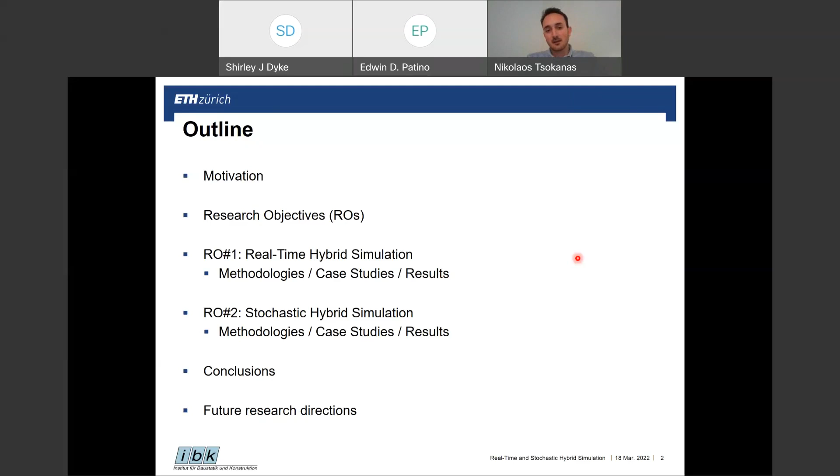So to begin with, what is the motivation behind this research project? It's often the case that prior to any engineering decision, we may consult a high-fidelity model in order to give some insight to the performance of the examined structure, but to also account for any potential risks that are embedded in its design. Therefore, the overarching goal is to develop some trusted models of uncertain engineering structures that operate under uncertain conditions. And this process is what we call dynamic virtualization.

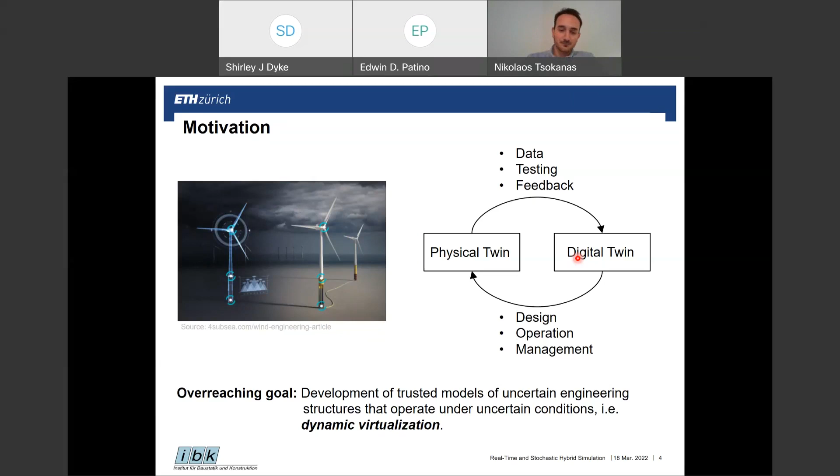However, in order to create such trusted models, it's essential to go through the so-called process of verification and validation. And today I'm going to talk basically about validation. A key element of validation is the experimental testing. And in structural engineering disciplines, we often come across three popular test techniques. The first one is the quasi-static test, which is the simpler to conduct, at least in comparison with the other two, but it can be restricted to the nature of the predefined imposed loadings.

On the other hand, we have the full-scale physical dynamic testing, with which we can get quite realistic outcomes, but the associated experimentation costs can grow significantly, because we don't only have to build a specimen full scale, but we also need the appropriate experimental equipment capable enough to test such large full-scale tests. And then another alternative is hybrid simulation, which corresponds to the whole part of this project. Basically, it combines the flexibility of numerical simulations with the realism of experimental testing. Essentially, it offers a cost-effective alternative to full-scale physical dynamic testing.

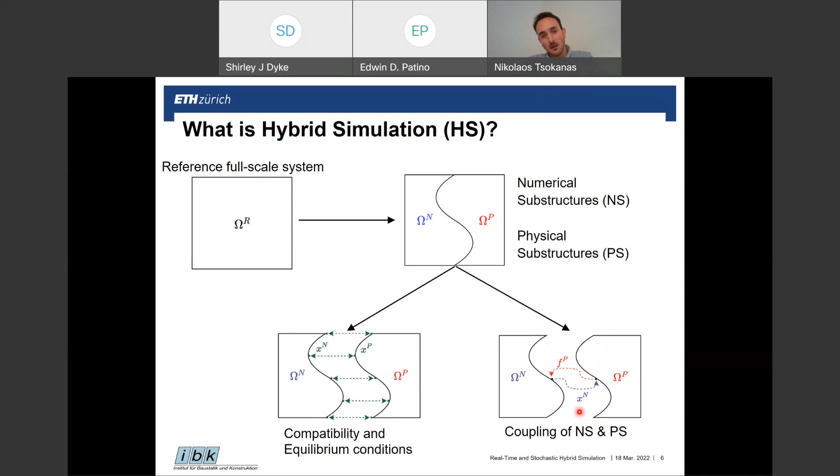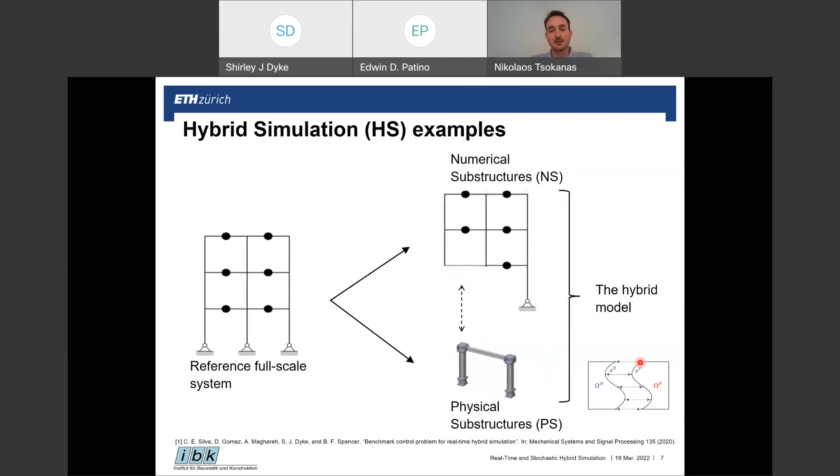And then at every time step of the simulation, we will need to ensure that the boundary conditions between those two are synchronized in order to ensure high fidelity results. Another example from another engineering discipline is this motorbike. Let's imagine that this could be the reference scale system. Now, if we're particularly interested in the transmission of the motorbike, then this could represent our physical substructure, built and tested physically in the lab, while the remainder of the motorbike is numerically simulated. And then again, the fusion of the two would form the hybrid model.

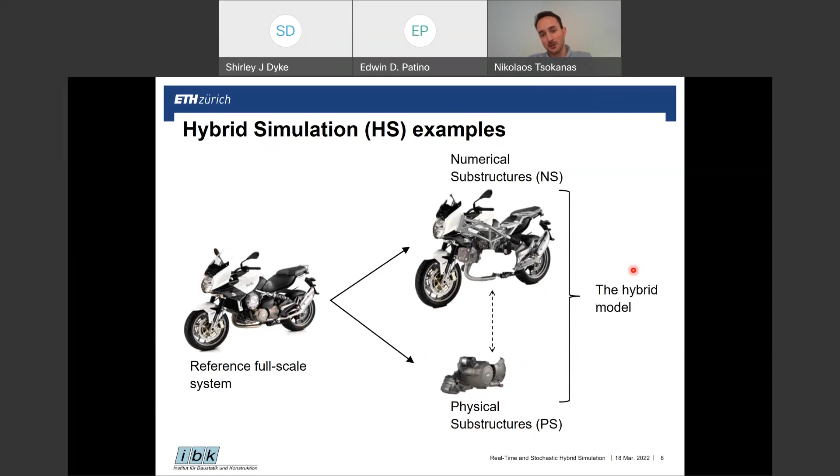But this brings us to the question of whether the actual hybrid simulation outcomes are reliable. So we're basing our assumption that by decomposing our reference full-scale system into numerical and physical substructures, and by only testing physically the physical substructure, taking into account the interconnection with numerical ones, we can have a cost-effective simulation technique alternative to full-scale physical dynamic testing. However, in order to have this assumption valid, we will need to make sure that the response of the reference full-scale system would actually be quite close to the response of our hybrid model.

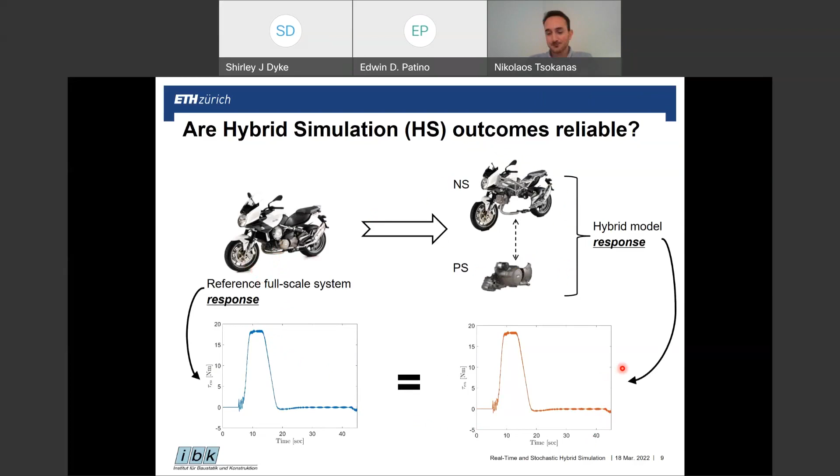And this point drove our motivation for the first research objective, which is how we can conduct hybrid simulations of high fidelity. And it's often the case that we will need to do hybrid simulation in real time to achieve this. Nevertheless, when we try to do that in real time, we may come up with several challenges that we need to overcome. And the exact objective of this first research objective is what methodologies can we develop to overcome such challenges.

Once this is accomplished, we can move forward to the second research objective, which is to extend the state-of-the-art deterministic hybrid simulation to a more stochastic version. And by this, I mean to account for the stochastic nature of uncertain structural systems. And the motivation behind this is that it happens often that we may not know some parameters of our hybrid model, for example, the damping structure, some boundary conditions, as well as the excitation, which is in most cases stochastic. These are things that we do not know, or we do not know at a certain level of confidence.

And therefore, it's important to understand how these associated uncertainties can propagate and how they can affect our system's dynamic response. And essentially, what we want to achieve is to unveil the structural sensitivity of the prototype structure to these input uncertainties. And then outcomes of such studies can assist not only in the design phase of structures, but also in the design phase of future experimental campaigns.

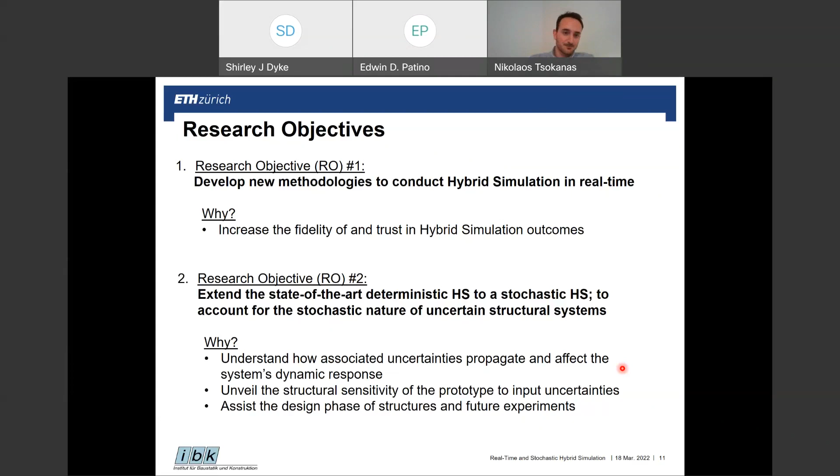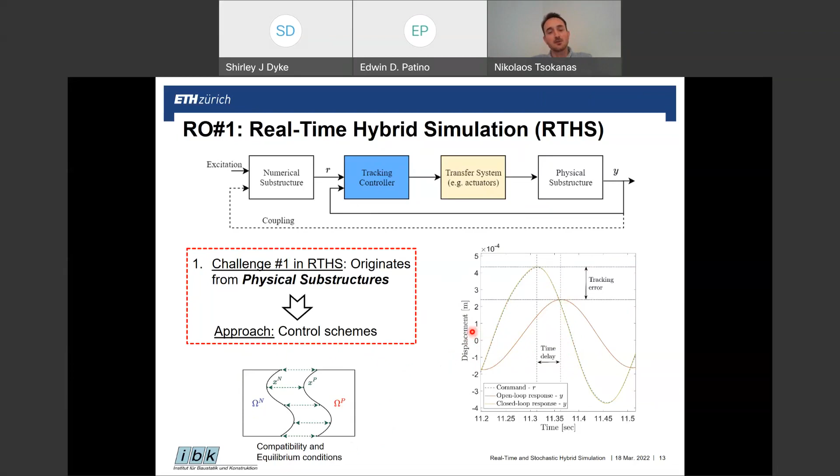Towards this direction, in this research project, we investigated two different control schemes. The first one is based on model predictive control, or MPC in short, along with the Kalman filter and the polynomial extrapolation algorithm. So the objective of the controller is to provide a tracking control, compensate for time delays, and at the same time be robust to uncertainties and disturbances that may be introduced during the hybrid simulation. We also verified the performance of the controller with two case studies, and the results were promising.

A few words regarding what MPC is. MPC is an optimal and robust control method, and at its core lies basically optimization. So what we try to do is to minimize an objective function. And this objective function actually embeds the tracking error, the error between our reference signal and the measured one.

So the designer can specify some group of time steps, and in every group of these time steps, optimization is being done within the simulation while the simulation is running, and then due to this optimization, a new control law is being derived. So although new control laws are being derived within the same simulation, the controller itself is not adapted yet, since the controller structure remains the same.

A promising feature of MPC is that the designer can specify some hard constraints to be met during this optimization. And this is particularly important when we have to deal with experimental testing, and so with hybrid simulation, because we have to deal with experimental equipment that has limited capacity, and therefore we need to respect such constraints.

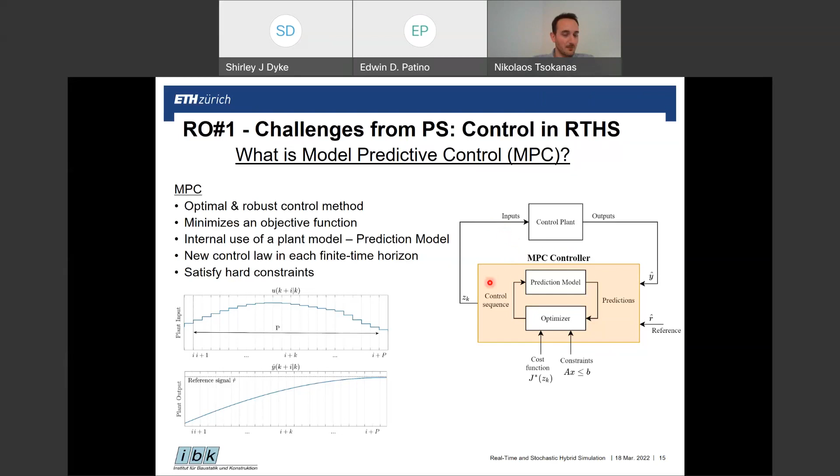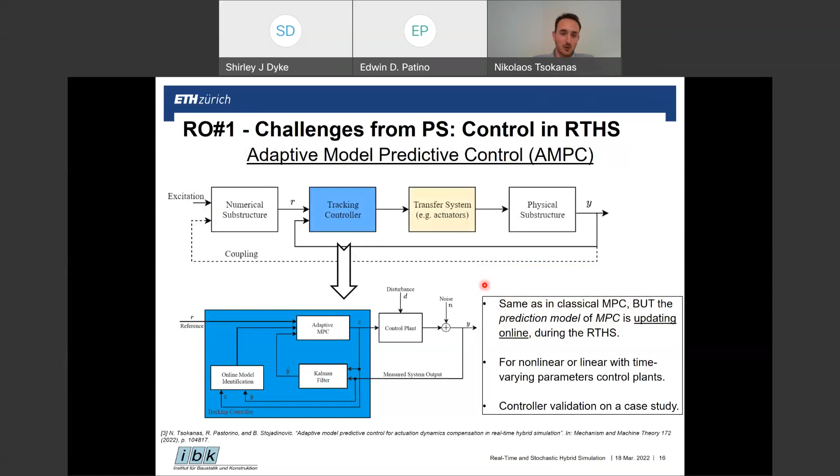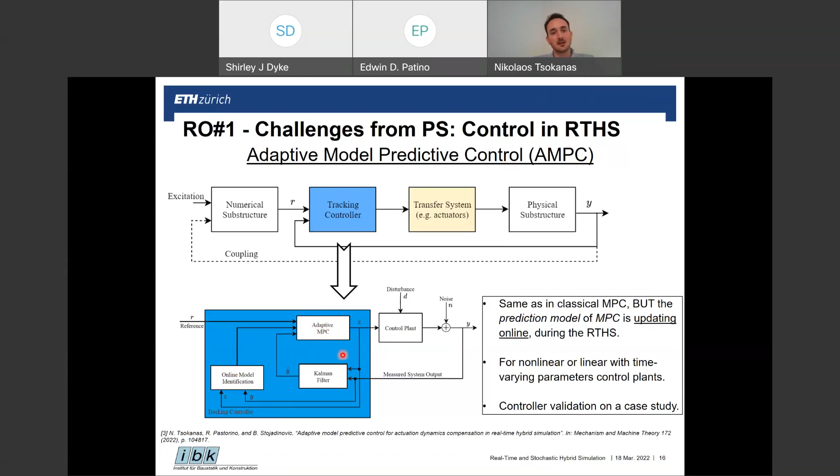And this is what triggered our motivation for the next control scheme that we investigated, and this time it's based on an adaptive MPC. So the concept is more or less the same as before. What changes in this case is that during the simulation, before we are actually doing the optimization, we try to identify the changing control plant dynamics. And therefore, by doing so, we come up with a new model of the plant every time we do the optimization, and we update the prediction model that is being used internally inside the MPC. We also used one case study to validate the performance, and again, the results were promising.

Moving on, so far I talked about challenges coming from the physical substructure itself, but we may also have challenges coming from the numerical substructure when we want to conduct hybrid simulation in real time. So recall this block diagram again, but now let's imagine that instead of only one numerical substructure, we have several. And now let's assume that maybe one or maybe all of them are quite high dimensional and complex. And then in order to adequately capture the dynamic behavior, we would need to decrease the time step of the simulation. However, by doing so, we also increase the computational power that is necessary.

And in real-time simulations, as well as in real-time hybrid simulation, when the actual computational time becomes larger or even close to the actual simulation time, then we may introduce time delays. We may also risk to distort the time scale of the simulation. And in the end, we may risk to falsify the results and the fidelity of the overall hybrid simulation. So in such cases, the only viable solution is to reduce the complexity of such high-dimensional numerical substructure.

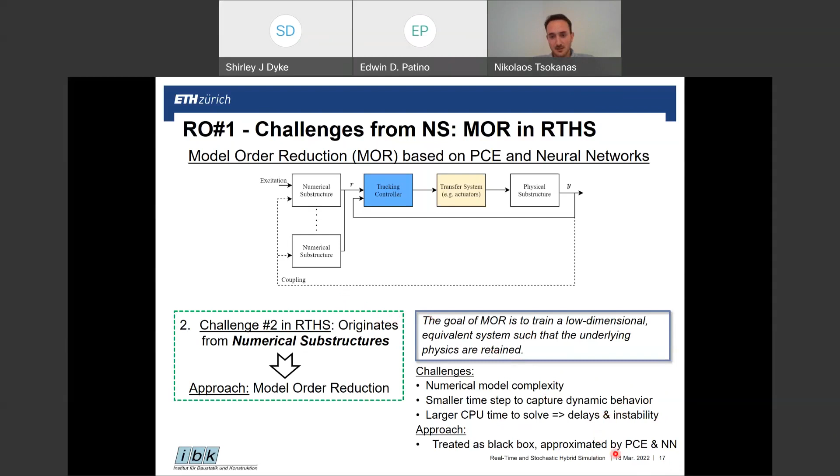And the way we tackle this challenge is by working on a model order reduction framework, trying to identify these critical components and treat them as black box. And therefore, we approximate their dynamics with some simpler to evaluate functions, and the methods that we use to do so are based on polynomial chaos expansion, or PCE in short, and neural network methods.

To elaborate a bit more on this framework, let's see this case study. Again, let's imagine that we have this motorbike as our reference full-scale system, and then we decompose into numerical and physical substructure. Then the transmission of the motorbike is our physical substructure, and all the rest will be our numerical substructure. Here we can see a block diagram of our hybrid model. Here you can see the transmission of the motorbike, physical substructure, and then we have four numerical substructures: the engine, the motorcycle body dynamics, and the rear and front wheel braking system.

Now we identified that the rear wheel and front wheel braking systems are quite complex since they incorporate the hydraulic dynamics of brakes, and therefore we train one PCE and one feed-forward neural network for each one of these two. And the goal is to substitute the full order model with one of these two reduced models.

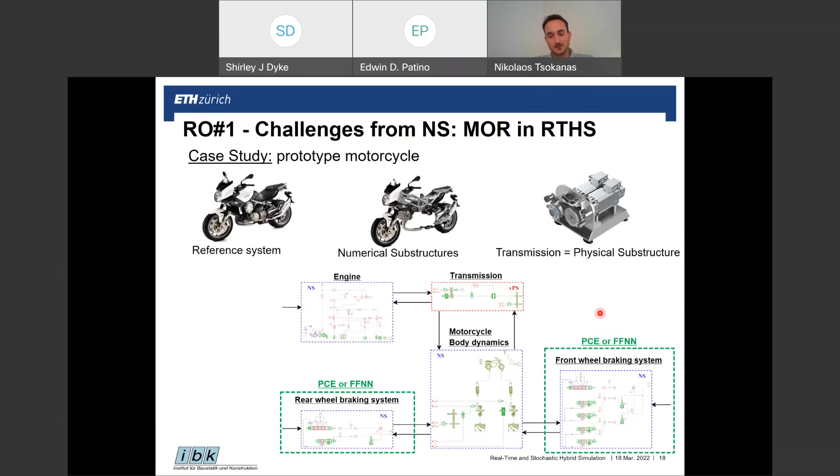To test the framework, we define four testing scenarios. The first one corresponds to a baseline scenario in which we test the hybrid model in its full order form. Then in the second scenario, we replace the full order model of the rear and the front wheel braking system with a PCE, one for each one of the two. The third scenario is more or less the same, but instead of a PCE, we are using a feed-forward neural network, one for each one of the two.

And in the last scenario, we do a mix. So we use a PCE for the rear wheel and the feed-forward neural network for the front. And the motivation behind the last scenario is to actually see if we can combine both of these two techniques within the same hybrid model.

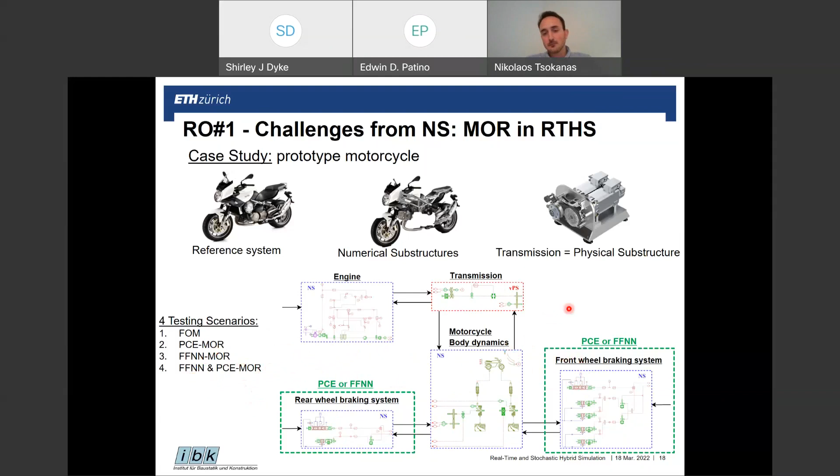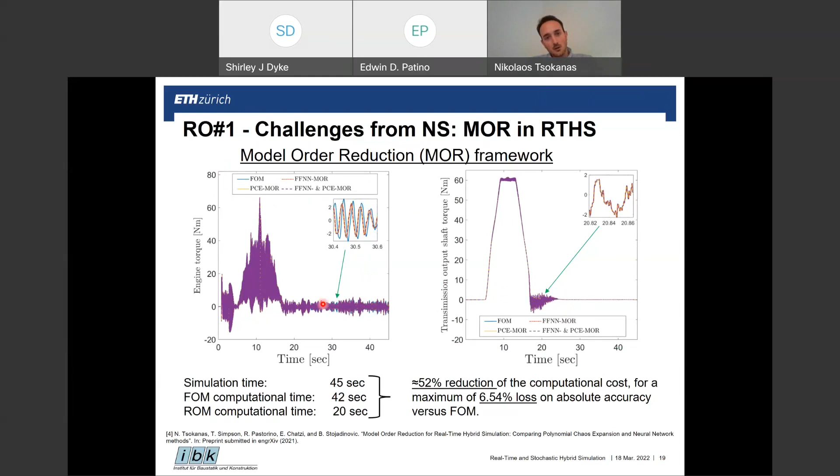So with that, I would like to conclude the first part, the real-time hybrid simulation, and move forward to the next one, which is the actual stochastic hybrid simulation. So recall that the idea behind this objective is to understand how specific uncertain parameters affect our overall dynamic response, some quantities of interest of our dynamic response. To do so, we were working on an uncertainty quantification framework, which consists of 4 steps. And the overall goal of this framework is to conduct global sensitivity analysis.

So in the first step, we try to identify the source of uncertainty. And with this, I mean that we select parameters of our hybrid model whose variation we want to investigate. After we have done that, we can assign to them some known probability distributions, and based on these distributions, we can generate some samples. Then in the next step, for each of these parameter sets, we can run one full hybrid simulation and collect our quantities of interest. And in essence, what we are doing is to propagate these uncertainties throughout our hybrid model.

Nevertheless, in order to conduct properly global sensitivity analysis, we would need several of these points. And in essence, we will need several hybrid simulations. However, when dealing with experimental tests, this is not easily affordable, and therefore we had a problem. And the way to overcome this problem is by using the so-called surrogate models.

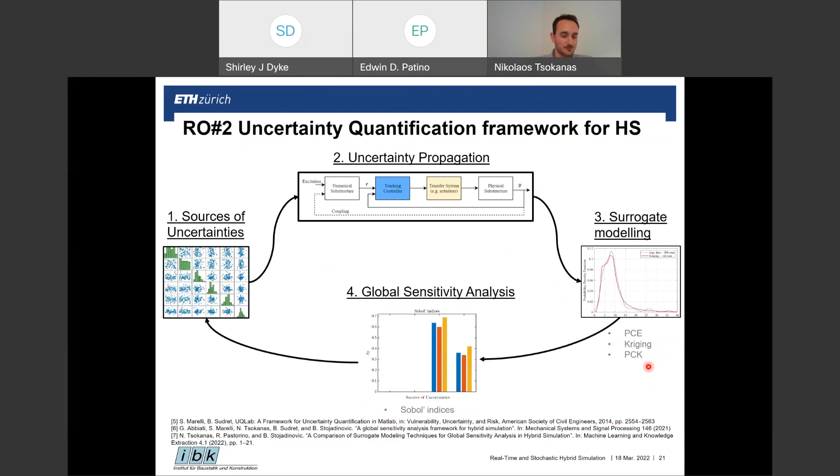Then step 1, we select our uncertainties. In this case, the excitation of the hybrid model is a mechanical excitation, and the input uncertainties are coming from this one. We select the amplitude and the frequency of excitation, and also we select as input uncertainties the values of the boundary conditions on the supports. So we have in total 4 input parameters. Then the quantities of interest are the maximum rotation and maximum bending moment on the left support.

Then we generate 200 points, and for each point we run one hybrid simulation, and with the collected data we can train one PCE, one Kriging, and one PCK for each of the 2 quantities of interest. And finally, once we are confident that these 3 surrogates are accurate, we can proceed to the last step, the one of sensitivity analysis.

Here we can have a look on the testing that is being used to run this hybrid simulation to collect these points. Here we can see the beam element of the physical substructure, and here we can see 4 actuators which are actually controlling the boundary conditions on the left and on the right side.

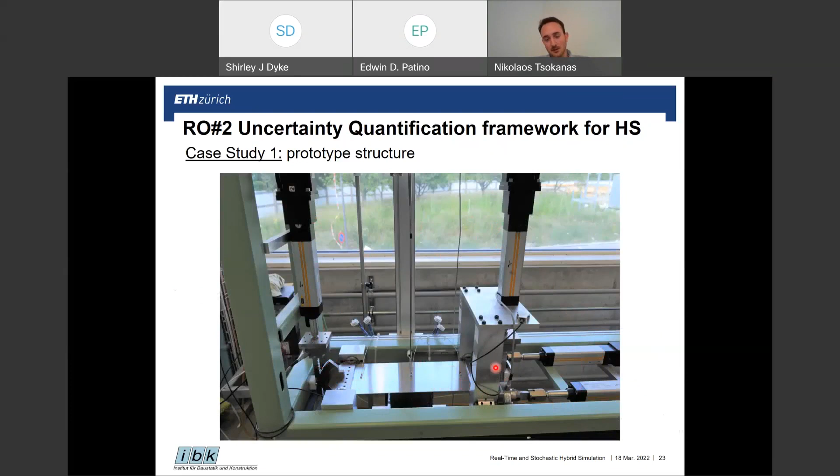So here we can see the results of the sensitivity analysis. Here on the x-axis, we see the input uncertainties and the total Sobol indices for each of the 2 quantities of interest. In both cases, we can observe that the most dominant parameter is the frequency of the mechanical excitation. What we can also observe in this slide is that when we are computing Sobol indices using those 3 different surrogating techniques, the results are not so different with each other.

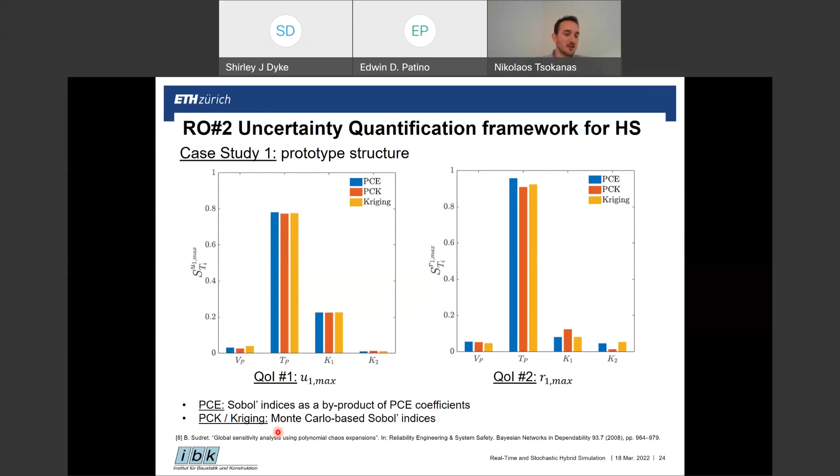An important remark is that once a PCE has already been developed, then the Sobol indices can be computed as a byproduct of the PCE coefficients at no extra computational cost. And that's not the case though for the PCK and Kriging. And the way to compute the Sobol indices in these cases is by running some Monte Carlo simulations.

So to recap this case study, we managed to compute some accurate surrogates using 3 different techniques, and then through sensitivity analysis, we managed to unveil the inner workings of the prototype structure to these uncertainties. However, we consider only uncertainties coming from the numerical substructure and from the excitation of the hybrid model. Therefore, we assume that the response of the physical substructure is deterministic.

However, that's not a realistic scenario, as in reality, nominally identical specimens do not have identical responses. And therefore, this triggered our motivation for the next case study that we investigated, in which we consider a stochastic physical substructure. Now, in order to make a stochastic surrogate model, we also use a different one, the generalized lambda model.

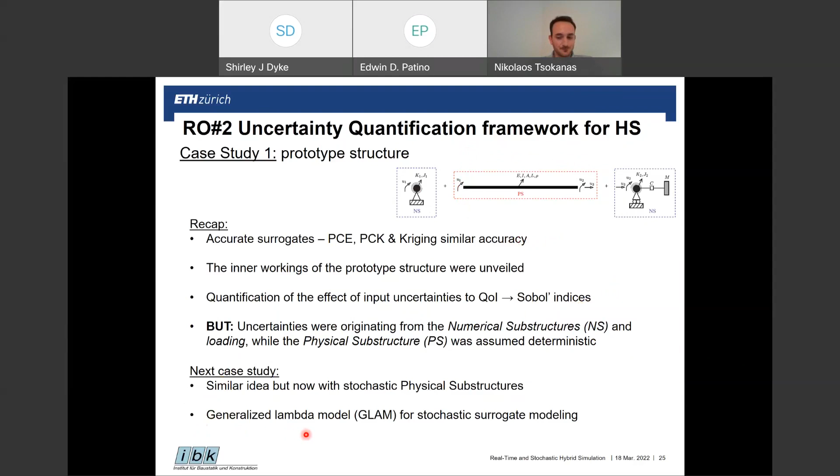In this case study, the reference structure is more or less the same as before. However, now apart from a mechanical excitation, we also have a thermal excitation. The temperature fluctuations of this thermal excitation are assumed to make the hybrid model response stochastic. As before, the physical substructure is the beam element and the numerical substructures are the boundary conditions on the supports.

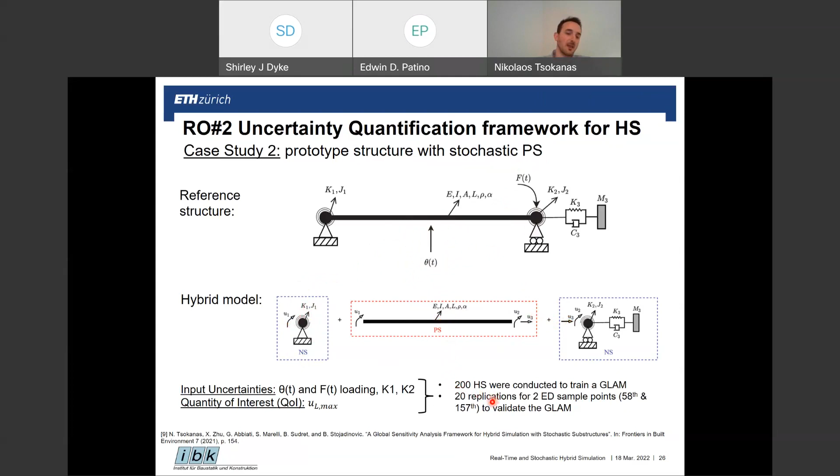It's important to remark that an advantage of using the generalized lambda model is that we can train a stochastic surrogate without need for replication. We only need replications for validation. To make this more clear, our experimental design points include 200 points.

But as I said before, since now we have a stochastic physical substructure, we cannot use the classical Sobol indices, and therefore we are using an extension of them, the so-called quantile-based Sobol indices, and in particular we are using the 5, 50, and 95% quantiles of our quantity of interest.

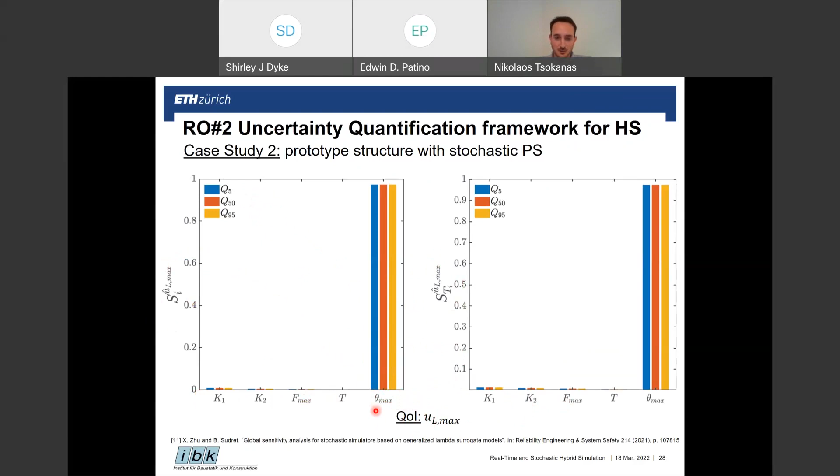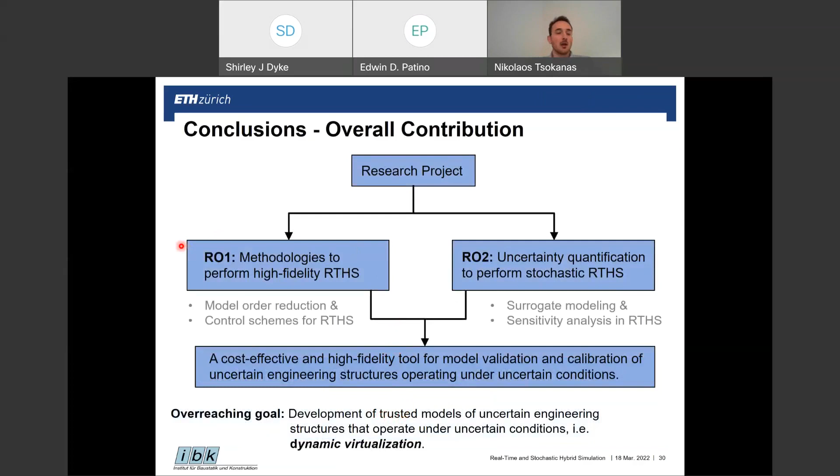So coming to conclusions, in this research project we had two different research objectives. The first one was how to deal with challenges arising when we want to conduct hybrid simulation in real time, with the overall goal of increasing the fidelity of the results. To tackle such challenges, we worked towards a model order reduction framework, and we developed two different types of control schemes.

On the other hand, the second research objective was to extend this concept to a more stochastic hybrid simulation. For that, we worked towards an uncertainty quantification framework using surrogate modeling techniques and sensitivity analysis. A combination of those two can provide us with a cost-effective and high-fidelity tool for model validation and calibration of uncertain engineering structures operating under uncertain conditions. This is aligned with our overall goal, the one of dynamic virtualization.

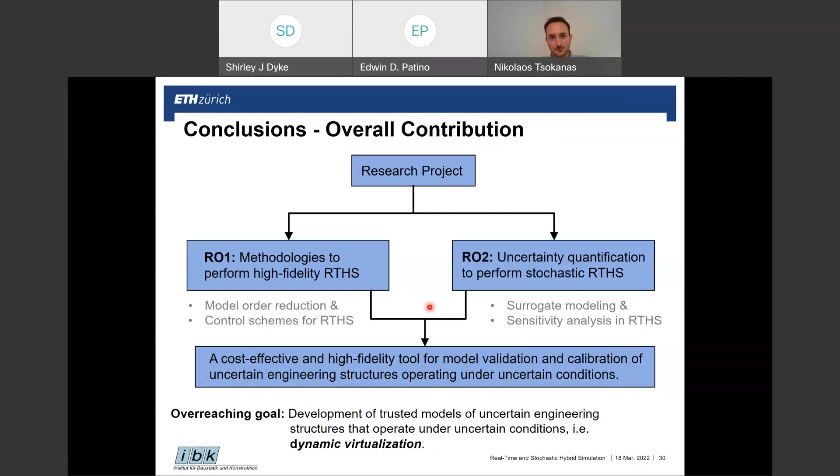Some future research direction regarding the first research objective would be to investigate how multiple model predictive controllers coordinate and perform within the same hybrid simulation. This has to do with when we have to deal with multiple degrees of freedom physical substructures.

Another point would be to investigate if it's possible to conduct hybrid simulation using a variable time step, which is aligned with the multi-rate concept of hybrid simulation. The motivation would be to capture discontinuities in the system response. For example, in rocking, when we have the impact, to adequately capture this phenomenon we would need to decrease the time step at that moment. With a fixed time step, this wouldn't be so easily possible.

Some research direction regarding the second objective would be towards active learning of the input parameter space. The idea would be to find the optimal experimental design, and in essence, the minimum number of points that we have to use in order to compute an accurate surrogate model for sensitivity analysis.